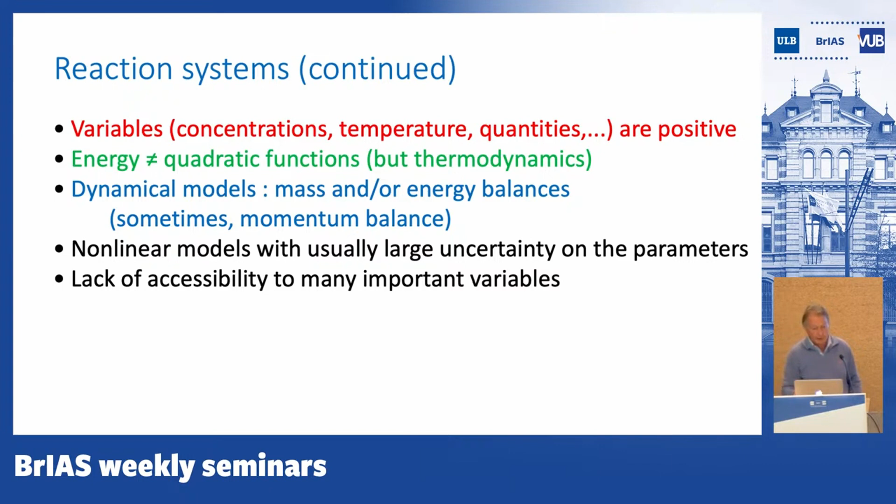On top of that, most of the models, 99% of the models, are nonlinear, but also with a large uncertainty on the parameters. And also there's a lack of accessibility to many important variables. In many instances, for any of the examples that I mentioned before, it's very difficult to get online, precise, reliable measurements of the variables that are important for the dynamics of the system.

Okay, so I would like to start with what I call the general dynamical model, then move to what I would call two key properties of any reaction system, and then I will deal with state and parameter estimation and then adaptive control.

Okay, so what I say is that this equation, which is a matrix equation, is a general way to look at any reaction system in a confined medium. Confined medium means that the system is homogeneous. But you can consider variations of that, but typically this is always the same.

The first element is the transformation of matter. So typically, K r of x is the multiplication of a matrix, which in chemical engineering is known as a stoichiometric coefficient matrix, and in bio, or in any other case, it's a yield coefficient matrix. And r of x is a reaction rate, the rate at which a transformation takes place.

And all the other terms reflect the fact that the medium is not closed. So if it's closed, you don't have that term. If it's not closed, then you have the interaction with the environment. So F is the feed rate, what you put inside the medium. Minus Q is the term of gas that may go off of the medium.

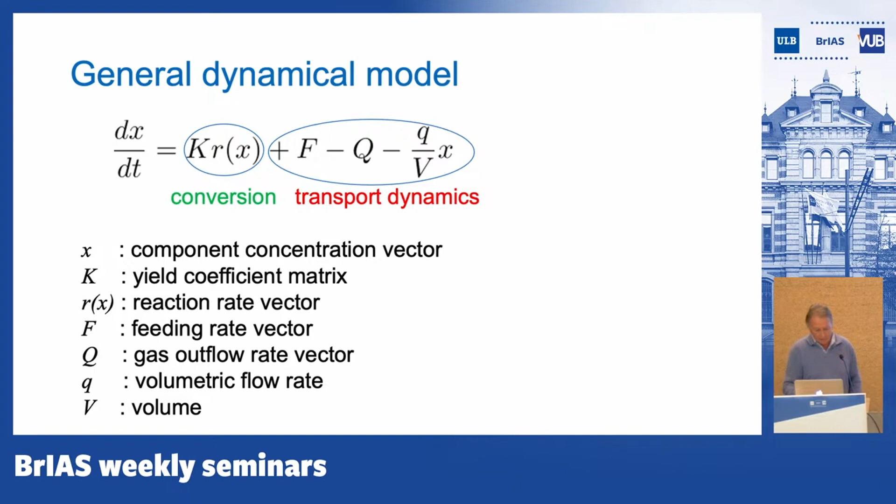And the last term is typically called the dilution rate, but it is the quantity of matter that leaves the medium. So this is typically transport dynamics. Lowercase q is typically a volumetric flow rate, and V is the volume. And having said that, I have everything to go ahead.

So let me take a first example, anaerobic digestion, which is a wastewater treatment. It's a wastewater treatment known for centuries. And it has the advantage to produce methane. So it was very popular at some point, typically with the first oil crisis in the 70s, because people said, we found an alternative to produce energy without oil. Anyway, this is a long story.

But this is a very complex process. In bio, they say this is an open medium. This means that you have a lot of different species, a lot of different bacteria that interact. And when I say a lot, it can be thousands. But one way to look at it simply is to consider that you have only two populations, and so this is what I call a simplified reaction scheme.

So I have a first step called acidogenesis, when you transform the organic matter that you want to degrade by acidogenic bacteria into volatile fatty acids. And these volatile fatty acids are then degraded to produce methane and CO2 at the same time, but this is done with methanogenic bacteria. So if I consider that, my model will be written as follows.

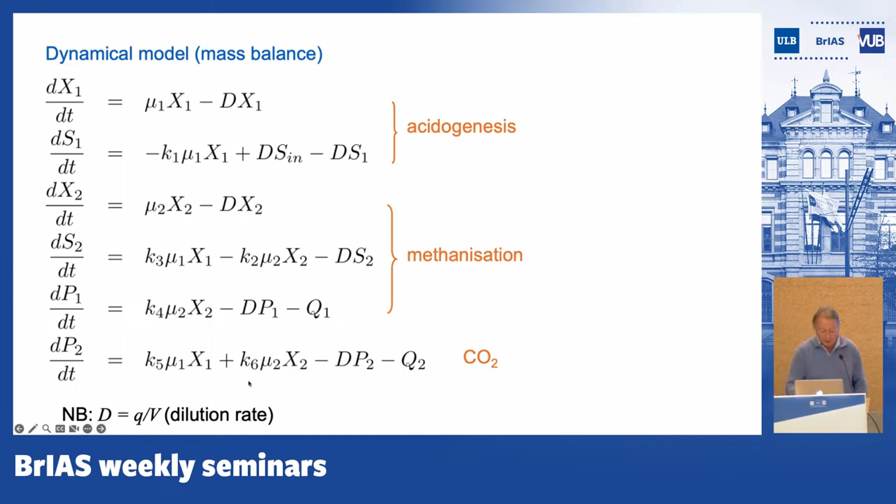So in this case, I use the classical notation of bio, where I have D, the dilution rate, which is nothing but the ratio of q over V. And if I want to put that in my general dynamical model, it's very simple. I just have to define my state vector with all the components in the reactions, and I have to define my yield coefficient or stoichiometric coefficient matrix.

So each column corresponds to each reaction, and each row corresponds to the intervention of one component in each reaction. For instance, if I look at this one, volatile fatty acid is produced by the first one, plus K3, and is consumed by the second, minus K2. Very simple. And it's completely general.

What is interesting in that case is that for bio, if we have bacteria, typically the reaction rate is the product of what is called the specific growth rate and the concentration of the bacteria involved in the mechanism. So this is known as autocatalysis. You need the biomass to have the reaction, but the biomass at the same time is produced by the reaction.

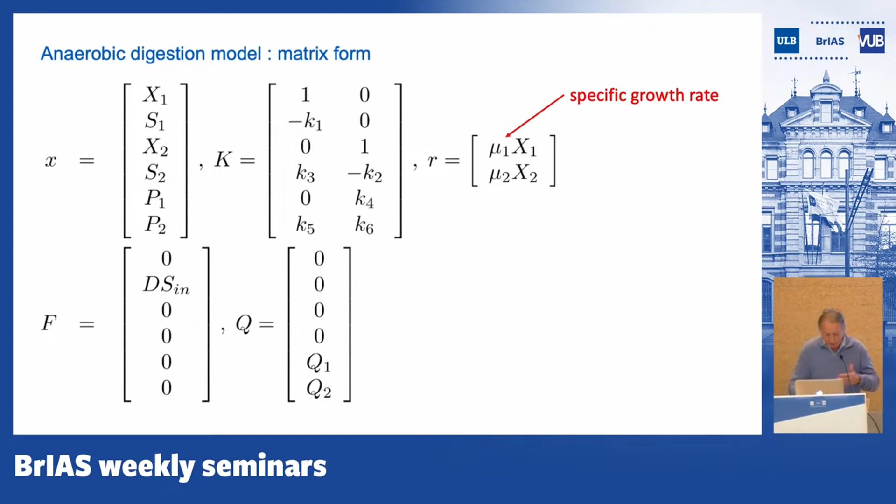So that's why it is not just a catalyst, which is quite known by chemical engineers, but it's an autocatalyst. Okay, anyway, this is a word that you could keep in mind if you wish. But of course, the issue in that case is: what can I put in mu? Is mu just a parameter? No, it has to depend on the system variable.

For instance, you know that if you don't have anything to eat, you will not grow. This is exactly what this curve shows. The more I eat, the more I grow. And this is known as the Monod model in that case. But then you can have indigestion. Okay, you eat too much, you get sick. And this is this term.

So this function is monotonic, and this one is non-monotonic. And so when you reach some maximum at some point, then you have a decrease of the growth. Okay, and then you can have a lot of other dependencies. For instance, you know that one type of microorganism will be active in a specific range of temperature.

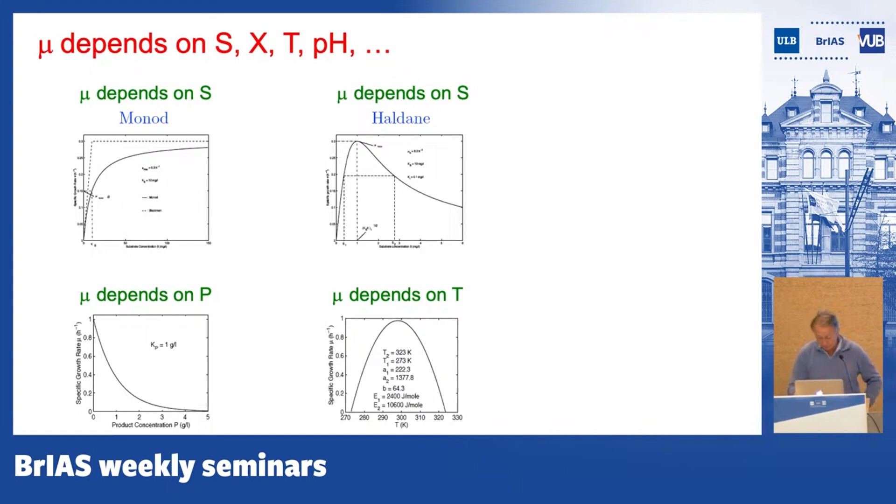Okay, fine. So I looked at the bio. So let me look at the chemical example. So in that case, typically, what is an issue for control is the fact that you have a reaction that can explode, if you wish, okay? And this is typically known as a non-isothermal exothermic reaction, where the reaction enthalpy might be negative, and so this can be a source of problem when you want to control it.

So typically, what is different from the example that I've shown before is that energy takes place, okay? And so the energy balance can be expressed in terms of temperature, which is a variable which is rather easy to measure, okay? So in that case, I can rewrite my model in my general dynamical model by considering that T is one process component.

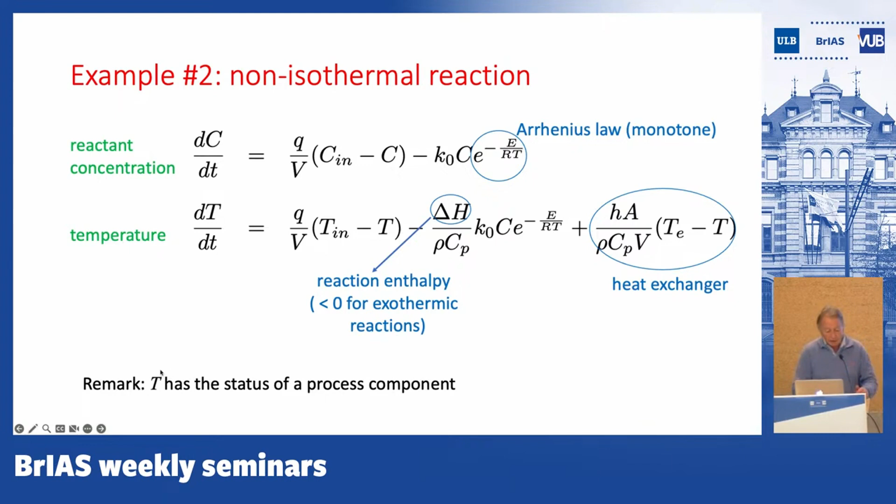Okay, let me move to a third example. It's an ecology example, the famous prey-predator model, where you have a mass balance for the prey, with a growth rate and a consumption term by the predator, and for the predator, the production by consuming the prey, and then a mortality rate, okay? This is exactly what I would have in the general dynamical model. Once again, it fits in the general dynamical model.

And this is a great example. I could tell you for long about that model because there are so many nice properties, and the fact that it's periodic. With that model, the idea was to emphasize that when you have a lot of prey, it tends to move to an increase of the predator. They have a lot to eat, but then the number of prey decreases, and then the predators don't have anything to eat anymore, so they decrease, and it's a kind of periodic behavior which is observed a lot in nature.

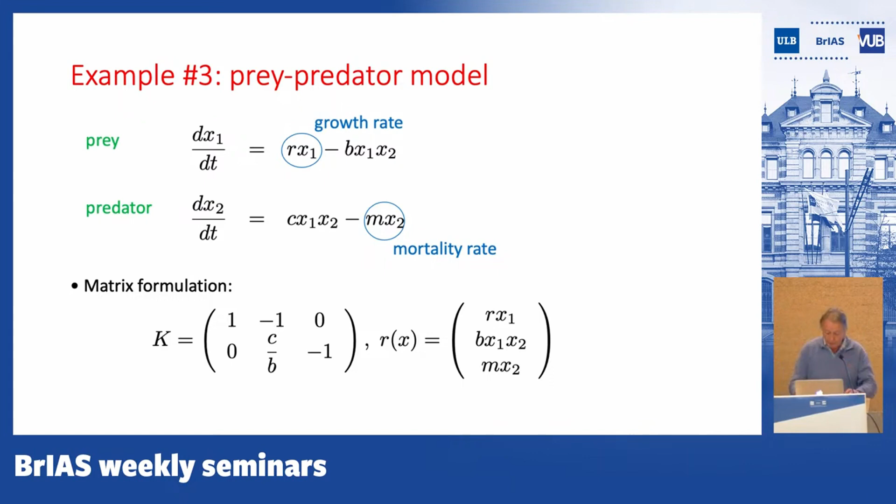Okay, so now I have my basis, I have my model, and I can start working, okay? But I want to do more, because I want to see what can I do? Can I take advantage of the fact that these reaction systems have some specificities? And so that's what I would like to mention: reaction invariants and slow-fast dynamics.

So the notion of reaction invariant is very well known in chemical engineering in general, and by chemists also. It's the fact that when you have a reaction A giving B, the number of moles of B that I produce is exactly connected to the number of A that I consumed. Okay, that's a constraint. So in a mathematical sense, this means that there is a mathematical constraint somewhere.

So typically when you have a system which is closed, with no exchange with the environment, this is a true mathematical invariance. Okay, this is exactly what I show here. So there's a general property. I can make a state partition XA, XB, such that the submatrix Ka related to XA is full rank. And then the property is general.

The property is that I can define a variable Z, which is a linear combination of XA and XB, where A0 is the solution of this matrix equation. And then in that case, I can rewrite the dynamics for XA and Z, and it is completely equivalent. So these terms are independent of the kinetics, or the transformation, let's say.

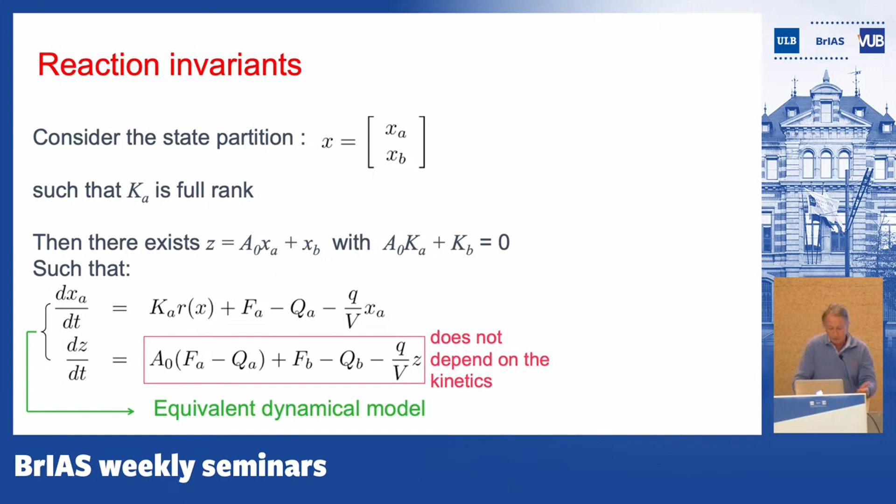The second property is what I like to call slow fast dynamics, often mentioned as singular perturbation. And so it ends up with a very well-known approximation in chemical engineering, which is called the quasi-steady state approximation. So let me try to explain how I can come up with that.

Assume that I have a sequence of reactions, A1 giving A2 giving A3. And I assume that the first one is slow and the last one is fast. And these are the reaction rates related to each reaction. K01, K02 are kinetic constants, but they have to be such that the reaction rate must be equal to 0 if there is no reactant. If I have no A1, I cannot have the reaction A1 giving A2. That's why I put this here.

And so intuitively, if you are engineers, even if you're not a chemical engineer, you will understand that very easily. If this reaction is slow and this one is fast, this means that any time I produce 1 mole of A2, it is directly transformed into A3. So it's like having one reaction, A1 giving A3. So how can I come up with that conclusion?

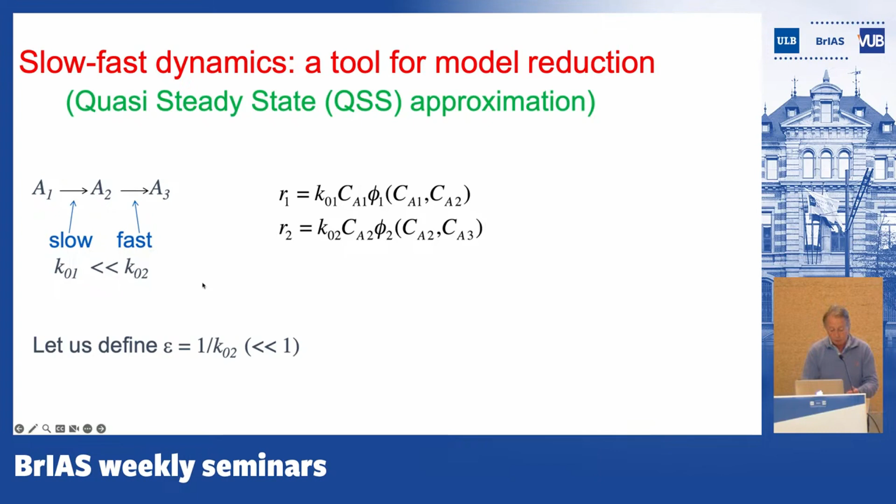I define a small parameter epsilon, which is the inverse of the kinetic constant K02. And I rewrite my dynamical mass balance for the concentration of A2, pre-multiplied by epsilon. I put epsilon to 0, and then I obtain this algebraic equation. And since I assume that this term phi has to be different from 0, the only option is that the concentration of A2 is equal to 0.

Second step, I make the mass balance for the sum of A2 and A3. I come up with this equation, and this becomes the mass balance equation for CA3 because CA2 is equal to 0. And so A3 is produced by the first reaction. Simple as that. So I can come up with a general rule with respect to that.

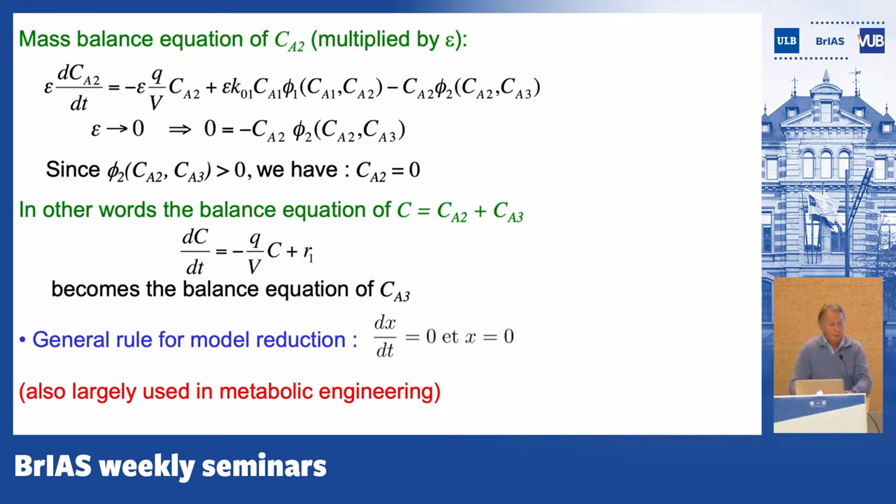But what is interesting is that, for instance, in metabolic engineering, this property is very largely used too. It's a very common assumption. The quasi-steady state approximation that I justify here is very common in metabolic engineering. So I try to make the connection with every field that I mentioned before.

Let's move to state observers. I would like to use my reaction invariant. My reaction invariant says that I can write part of the dynamics of the system independently of the kinetics, which is an issue because I have a number of models for the reaction rate, but all these models are typically heuristic. There's no fundamental model used in practice for kinetics. So this is an issue.

I would like to have a state observer which is in some way insensitive to the knowledge of the kinetic modeling. And so now I make another partition, where I put x into x1, what I measure, and x2, what I do not measure. I rewrite my z as a linear combination of x1 and x2. And I have to make sure that I can invert A2 in that case. In some cases, it's just a left inverse, but it's a classical inverse in most cases.

And so then what I do, I compute z from the equation that I mentioned just before, and then I invert this relation just to get, let's say, an estimate of the variable that I do not measure. And this is an observer, even if, as a classical observer, I don't have a correction term, this is an observer. Because I can guarantee, that's why we call it an asymptotic observer, we can guarantee the convergence. And the guarantee of convergence is related to this condition, which is very classical in adaptive control, which is called the persistence of excitation condition.

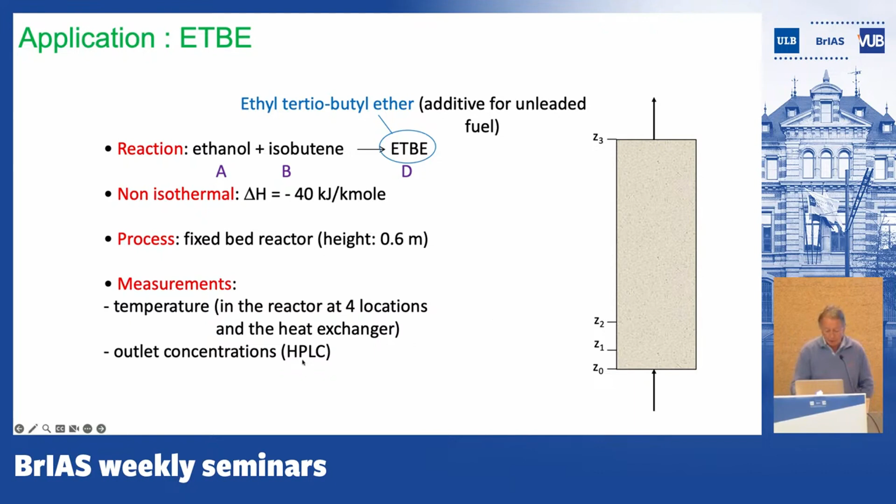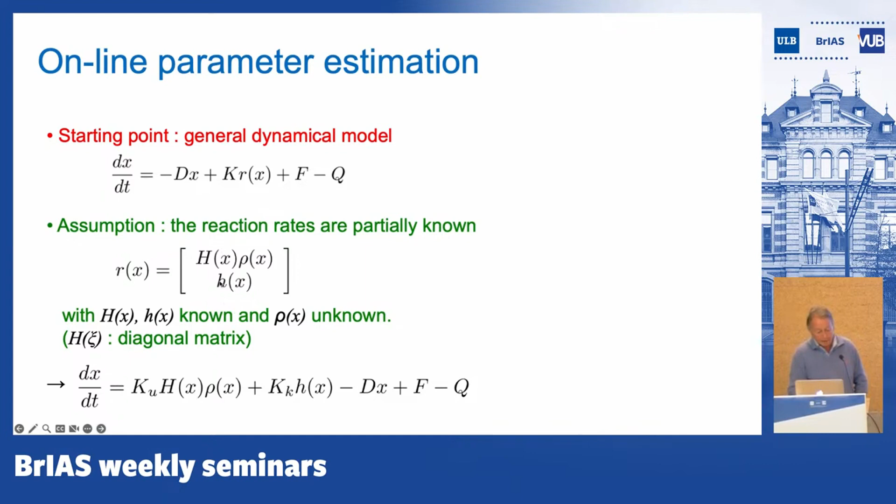Okay, online parameter estimation. So as I mentioned, there might be a lot of uncertainty typically on the parameters in the model, so we probably need tools to be able to reconstruct the parameters online. And so I go back to my general dynamical model. I assume that the reaction rates are partially known. Okay, so this is the unknown part, this is the known part. Okay, and I rewrite my dynamical model as follows.

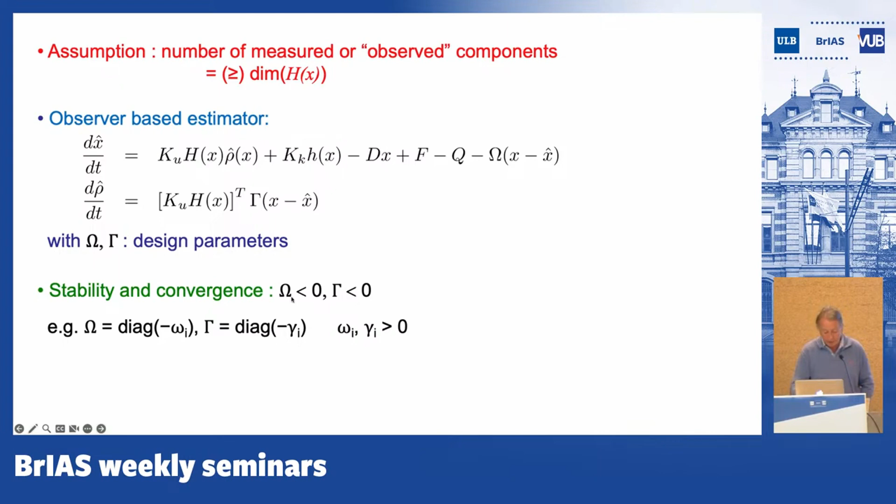So if I do that, and I assume that I have a number of measured or observed components which is equal to the dimension of the matrix H, which is here. Okay. And so I just use a classical observer-based estimator, with this correction term related to the states in that case. And so classical design parameters, omega, gamma. I know that typically I have this kind of rules. I can do that, it works. But we found one way which is much better than that, which is very easy.

So we say we can use a transformation in that case, where I have zeta, which is the inverse of the submatrix K, U, multiplied by the state vector, okay? And then, if I use that, this is how I can rewrite the equation, but it happens that because of this transformation, I can rewrite my observer on a basis of 2 by 2 equations. So one estimation is related to one measurement, or more precisely, one combination of measurements.

Okay, and then in that case, it's very easy to calibrate, because I have only a system of order 2. This is exactly what we have in that case. So we found a very simple way to calibrate the system, and a calibration that can be different for each parameter that you want to follow. Because in that case, typically what you have to follow is not a constant parameter, but a parameter that might change with time. Okay, so that's why I would like to illustrate that in the next slide.

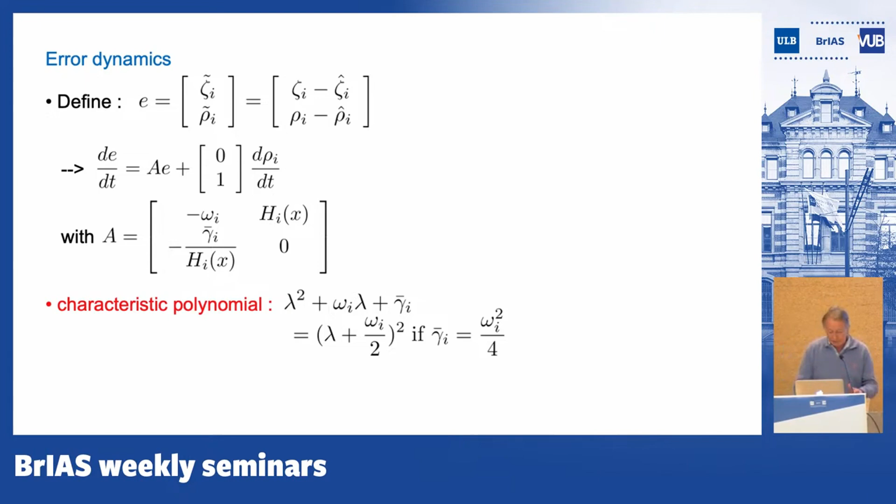So the application now is animal cell culture, which is also very well used in pharmaceutical applications. So in that case, we have a reaction scheme with 2 reactions. Glucose is in both cases. In one case, you only grow biomass, it's called respiration, because you have oxygen, okay? And then in the second case, you produce lactate, okay? And that's interesting.

So this is different from what I did before. We have a fed batch reactor. What is a fed batch reactor? In a fed batch reactor, you fill partially the tank, and then you introduce matter progressively until the tank is full.

Okay, so that's why it's called fed. So the first phase is fed: I'm feeding it, and then when it's full, I wait for the reaction to be completed. So this is what is called batch. So it's what is called fed batch, and that's very interesting, because you don't have steady state in that case. There's no steady state. The steady state is at the end, when there's nothing to be consumed anymore.

So this is a kind of system which is always in a dynamical situation, which is very different from what we have in many other automatic control applications. So we measure glucose and lactate plus some offline measurement of biomass, and we'd like to estimate the 2 specific growth rates. So that's very interesting.

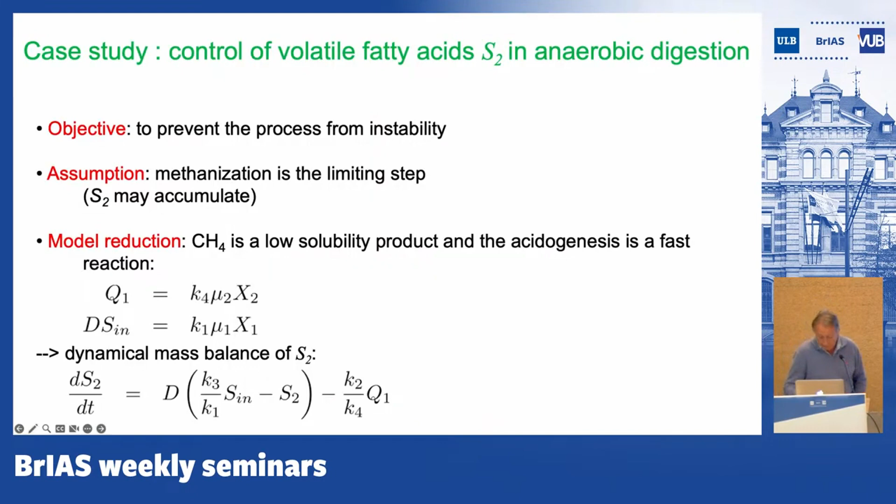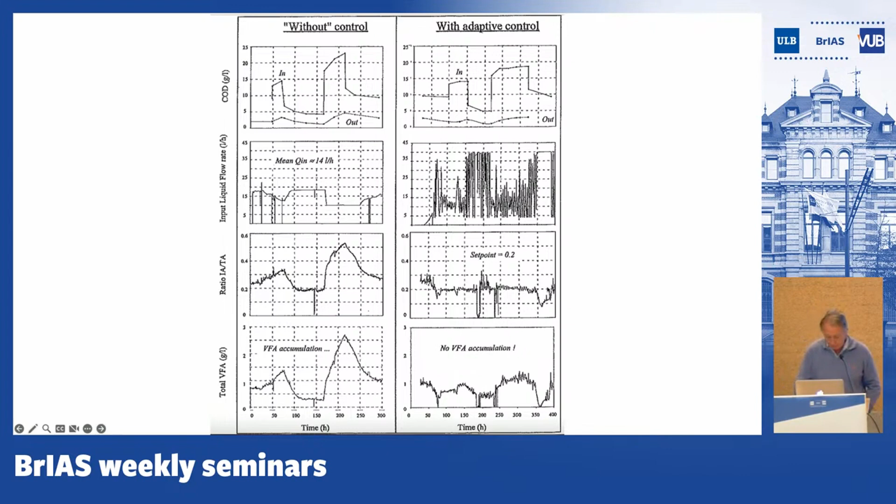Note that I have the inlet organic matter concentration here, and I have the methane gas flow rate here. And this is typically an example that we have in that case. So typically, if you see, where is it? Too fast. In that case, you see that the control works well for the volatile fatty acids. These are the results of a European project called Amoco that I had quite a while ago.

Okay, we can go one step further. So is it possible to get to optimal operating points without knowing what the operating point is? So once again, a lot of uncertainty about the system, but we know on paper, and we know from practice, that there is an optimum somewhere. And that's really the job of adaptive extremum seeking. So you do control at the same time that you do optimization.

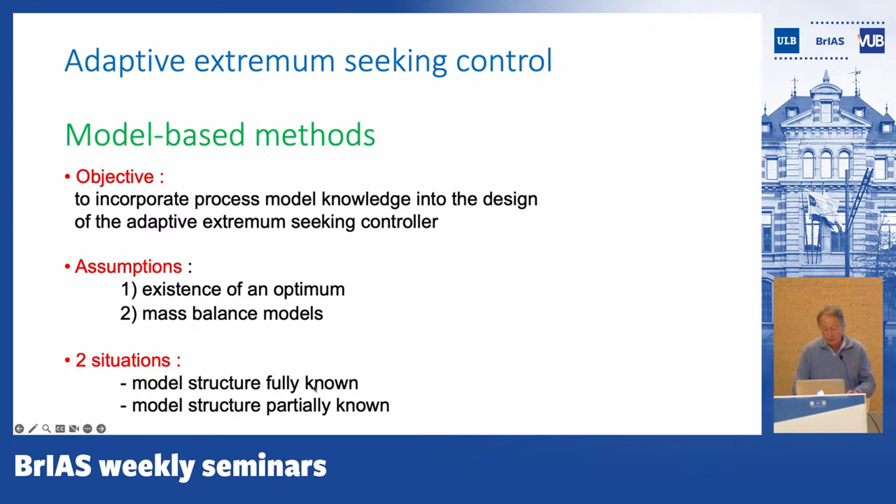I mean, in chemical engineering people tend to call that real-time optimization, but that's simply adaptive extremum seeking. So this is adaptive control, but at the same time the adaptation is related to the fact that you are looking for the optimum in closed loop. And so I have a lot of results on that, but there are typically two types of situations: one where the model structure is fully known, and one where it is partially known. I just use an example for the second part.

So once again, I go back to a simple example: one biomass, one substrate, and one product. So this is the equation that we have obtained by model reduction, and we assume that we have a Monod equation in that case. So we don't know the parameters of the Monod model, but this is not a strong assumption. For convergence analysis, we need to assume that this term is bounded. And we assume that we measure the gas flow rate, and we measure the substrate concentration S.

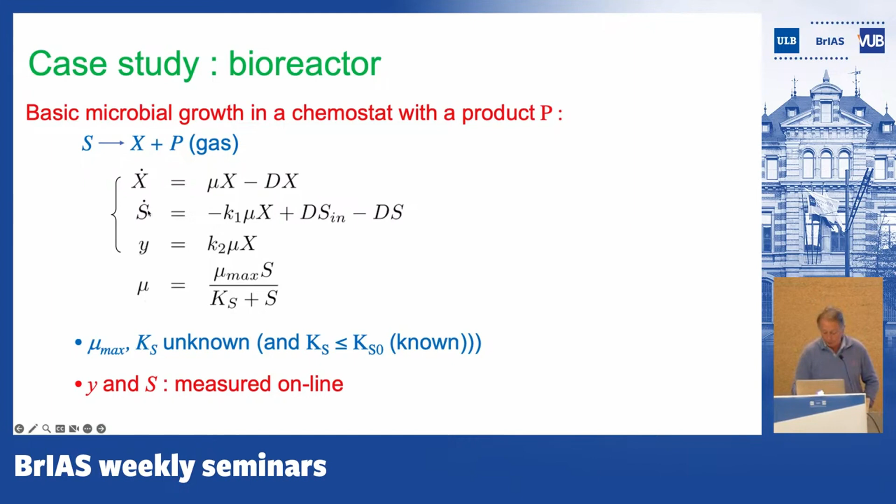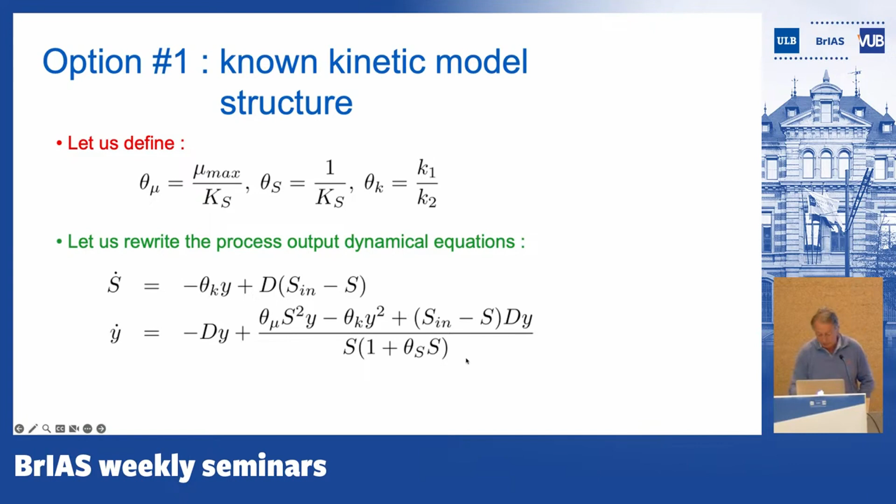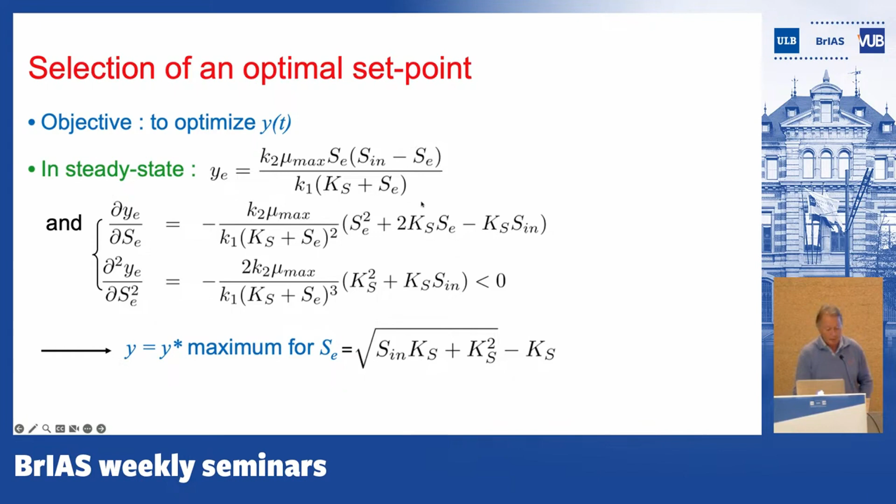So what we do, we define three new parameters, theta mu, theta S, theta K, and we write the dynamics of the system as follows. So we compute the time derivative for y, which is exactly what we have here. Note that we have this at the denominator, which will be interesting to understand. So if I want to make sure that I have an optimal point, I compute twice the derivative of y with respect to S. You see this term is strictly negative, and you see that there's an optimum if this term is equal to 0. So the optimum is for the concentration of substrate which is equal to this value.

And so there are two steps. First step is the parameter estimation. Once again, this kind of classical observer-based estimator. And so the parameters are in the two equations here, and I update the parameters by using this, except that I also use a projection algorithm in that case to avoid having a division by 0.

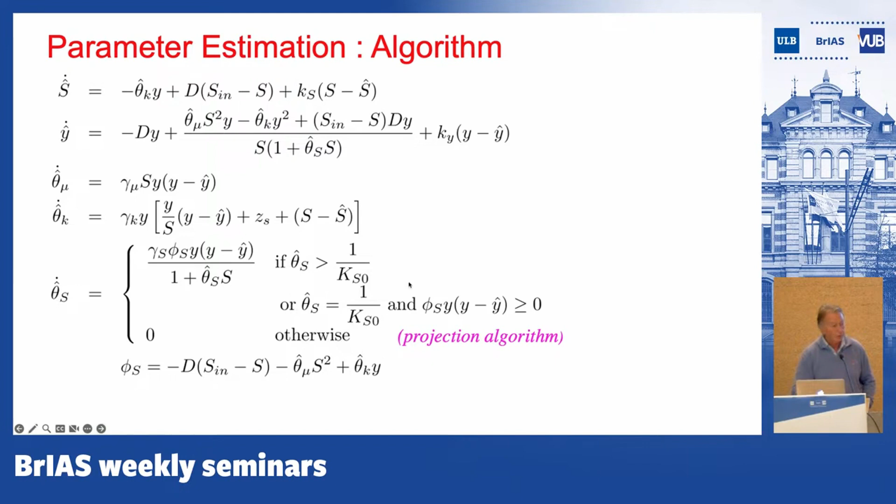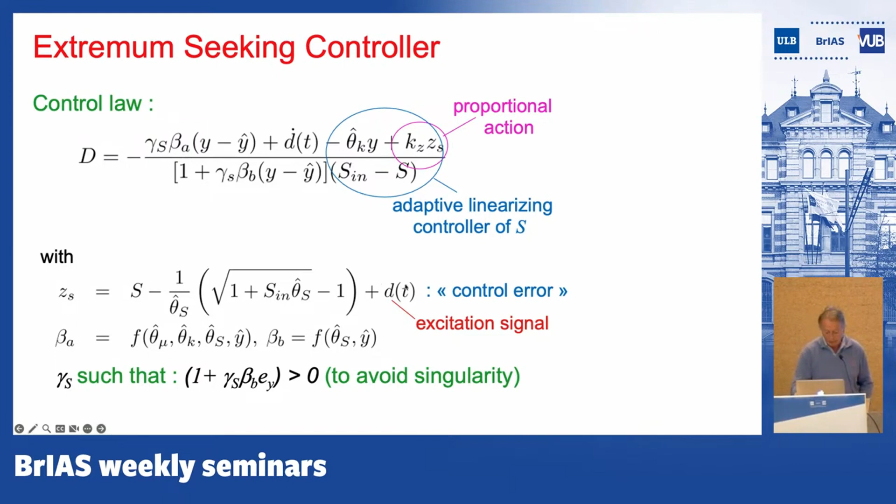In that case, this is my control error, but with the dither signal also at the same time, okay? And so if I want to look at the convergence of this, I have this Lyapunov function, and remember that I have this term somewhere at the denominator in my equation for y, okay? So this is probably one of the nice tricks in this case. So this is classical. I have a term which is the square of the control error, terms which are related to the square of the error in the parameter estimation, and then two terms which are related to the estimation of, let's say, the observer based part of the parameter estimation.

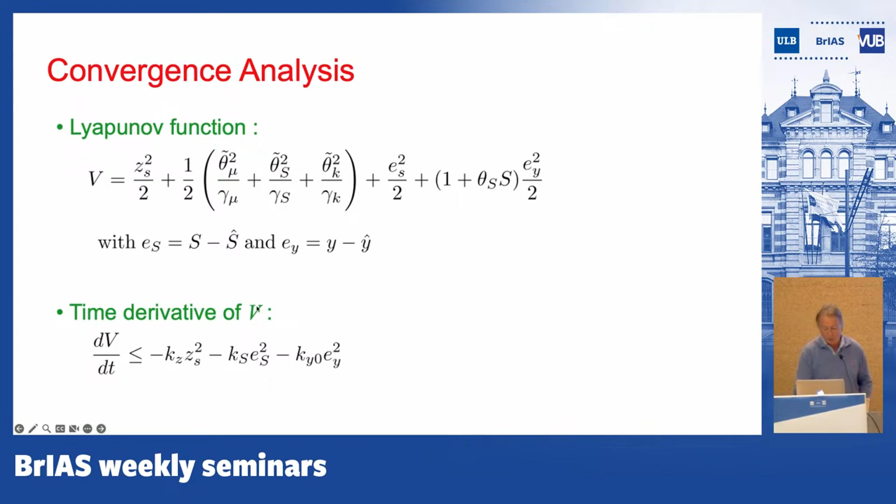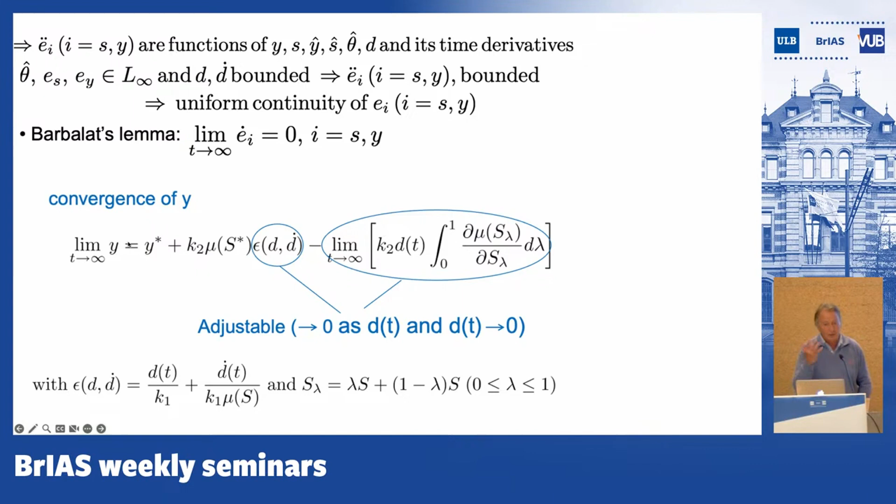Okay, and so it's easy to show that in that case I have this value for the time derivative of V. Typically, I can invoke the LaSalle-Yoshizawa theorem and Barbalat's lemma to show that I will converge close enough to the optimum in that case, which is exactly the result that I have here. So typically, these terms are related to the external excitation or the dither signal, if you prefer. So this term will tend to 0 if my dither signal and its time derivative tend to 0. So in that case, I can show that I converge to the optimum without knowing the optimum. Okay, that's the idea of adaptive extremum seeking.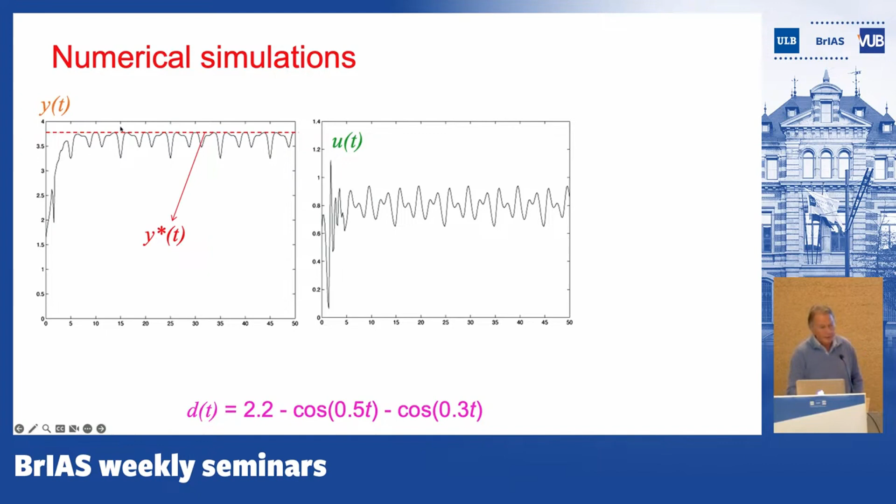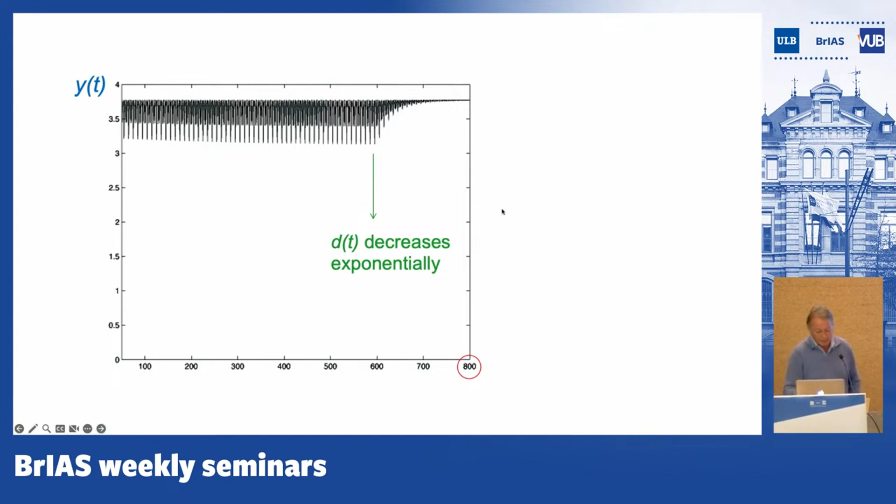Just a few simulations. So note that in that case, because it is a maximum, it's impossible to move up over it. Okay, we are always below it. But then this is exactly what we have, the convergence of the parameter in that case. And the fact that it can remain close enough to the optimum. Then if I remove the dither signal, it will tend to the optimum, okay? The parameter, in this case. So a lot of possible, let's say, extensions of that.

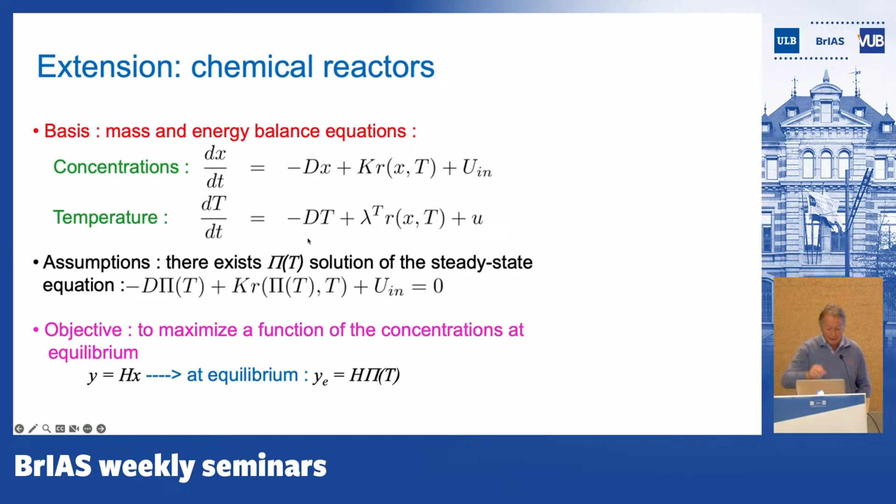This is an extension for chemical reactors. Remember that I have the concentration of the different reactants and products, the temperature here, and in that case we know that there is an optimum, typically when I have a sequence of reactions, which is the case here, A, B, and C, which is indeed part of what is called the Van de Vusse reactor. So the optimum is somewhere here. We start from nowhere, if I may say it like this, and you see that it converges to the optimum.

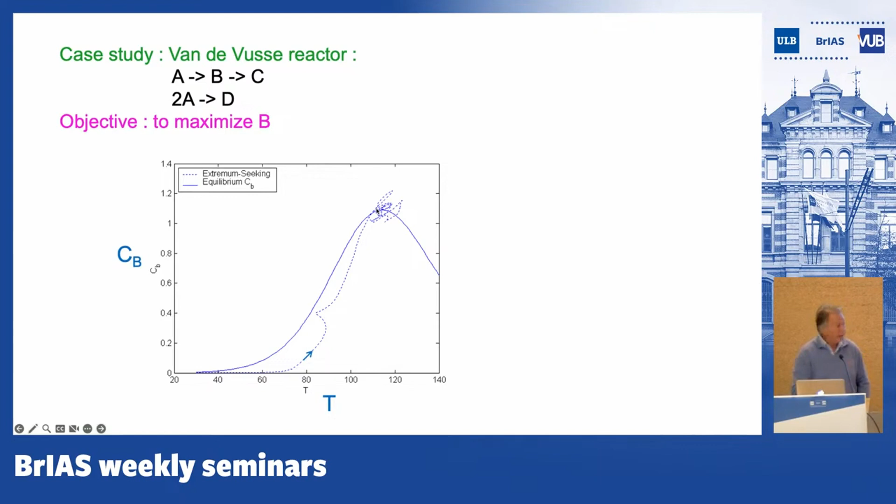And before that, I'd like to put that in your agenda. In 2 years from now, we are going to have the ECC here in Brussels, on the UC Louvain site in Woluwe.

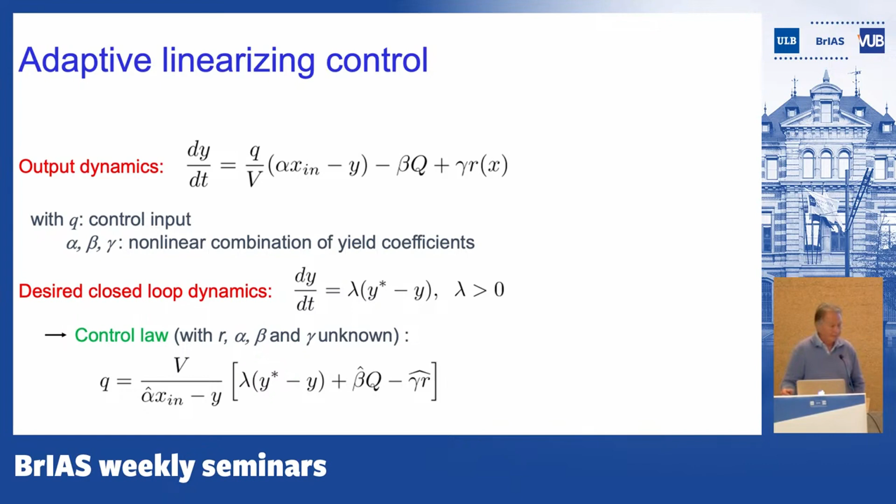Thanks. So I'm from a completely different field, so it's interesting to see your presentation, but I'm not sure I follow everything. But one thing that struck me is that throughout you seem to assume well-mixedness of the systems that you're looking at, so that the concentrations can be described by a single scalar variable. In my field, sometimes we've moved away from these kinds of equations to simulations that are more individual based, because that well-mixedness assumption is violated. And I'm just curious whether you've sometimes felt the need also to move away from that.

It's a personal decision to make a presentation considering only homogeneous systems. But I worked a lot on what is called distributed parameter systems, PDEs, which are very largely used in reaction systems, chemical engineering, for instance. It happens that I have a book that will come out these days on that topic. So, of course, I know how to handle that. It's more complex than what I've shown here. But there are many ways to extend what I said to cases where I clearly don't have homogeneous conditions.